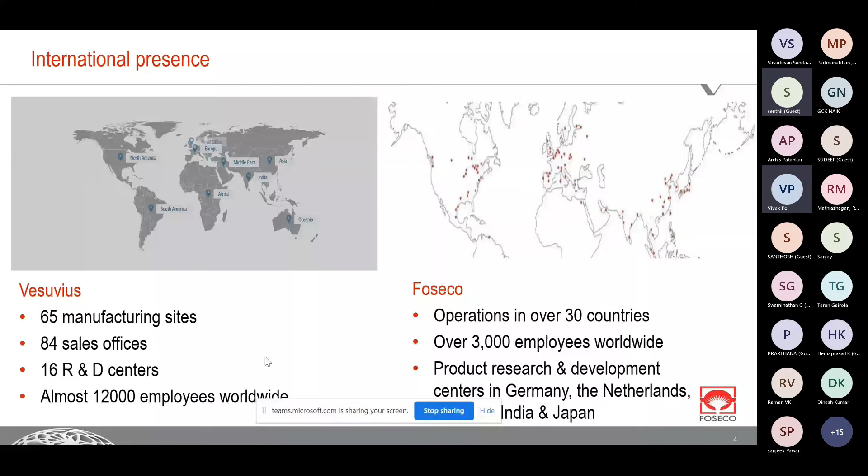As far as manufacturing sites for India are concerned, Vesuvius and Foseco put together have 5 locations at the moment: Mehsana, Pune, Pondi - mainly foundry consumables - Vizag for refractory materials, and Kolkata for flow control systems, mainly stoppers and nozzles with respect to foundry. These are the main product lines. Apart from that, the flow control products required in the steel industry are different. So overall, the advanced refractory manufacturing facility is in Vizag, and flow control is in Kolkata.

About Foseco, a part of Vesuvius PLC, which is 100% dedicated to the foundry industry. Foseco always works to improve foundry performance by offering different products, technologies, and services, and we have local expertise as well as a Foseco global team, which is present for extending their support.

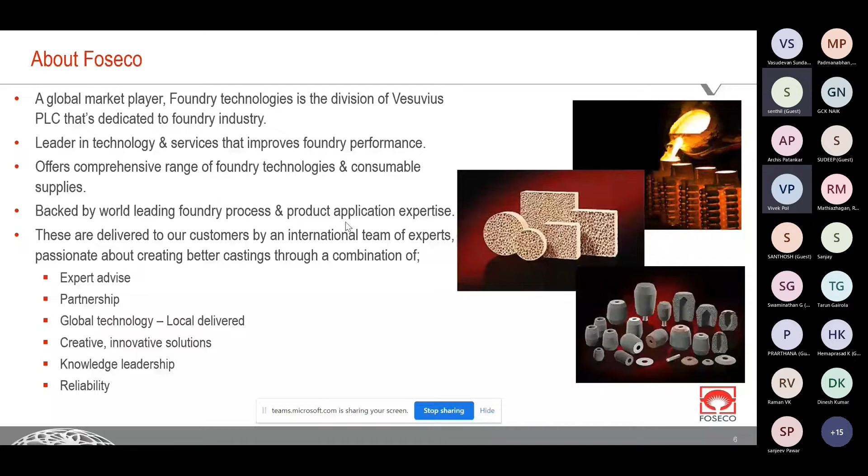So it is a global exchange. Some foundries have transnational accounts, so common practice is also being shared, and these types of benefits we get and we can deliver to our foundrymen.

About application engineering, apart from the advanced product technology, we have software. In case of feeding system solutions, we have simulation software. In case of metal treatment, we have advanced thermal analysis tools. So these are the backups, advanced tools and product technology. This overall application engineering is helping foundries to resolve issues and to improve performance.

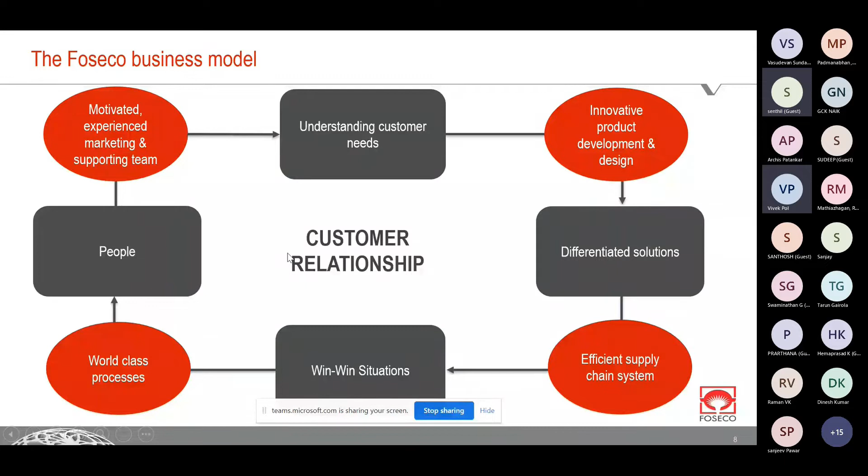I would just like to touch upon the business model. Foseco's base is customer centric, customer focused. Understanding the customer need is the first thing, and then product offerings, innovation of products, to create value and to get a win-win situation. Whatever needs are there are fulfilled with the help of world-class processes and technologies, and overall experienced people. So this is how we work.

So now we'll start our presentation with refractory, understanding refractory. So what does refractory mean? For many of you it is very basic, but still we will cover it quickly. A refractory is a material which can retain its strength at high temperatures, so deformation will not be there.

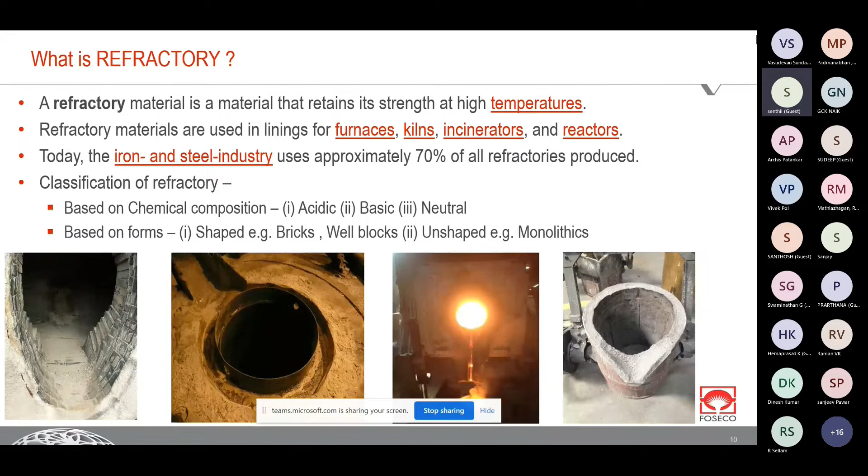The basic difference is that acidic refractory is silica based, basic refractory is mainly magnesia based, and neutral is a combination of magnesia and alumina, normally called spinel forming material, MgAl2O4. Acidic lining, which is silica ramming mass, has very good thermal shock properties. Basic, which is magnesia, has good resistance to slag attack as far as steel metal is concerned.

The choice of refractory is normally made based on what type of slag is generated in the furnace. For iron, the slag nature is acidic, so acidic refractory, silica ramming mass, is used. For steel, since the slag nature is basic, basic ramming mass is used. But there are challenges with basic ramming mass, as thermal shock is not as good as silica ramming mass, in steel melting practice. If acidic ramming mass is used, it will not withstand the slag attack.

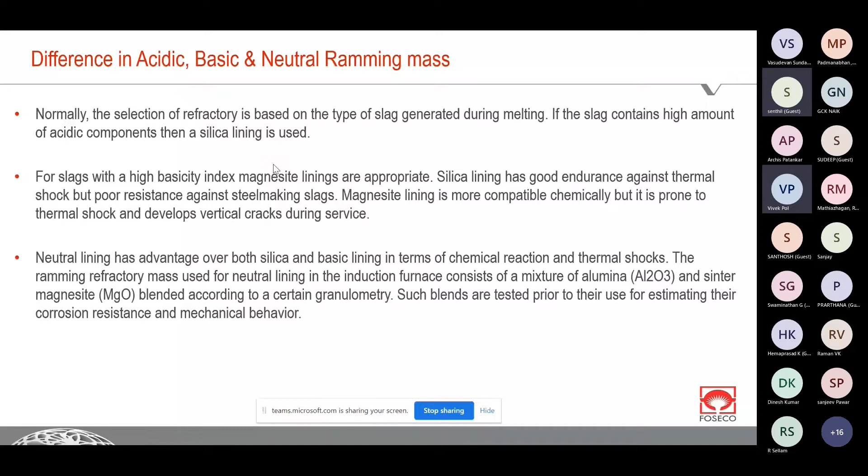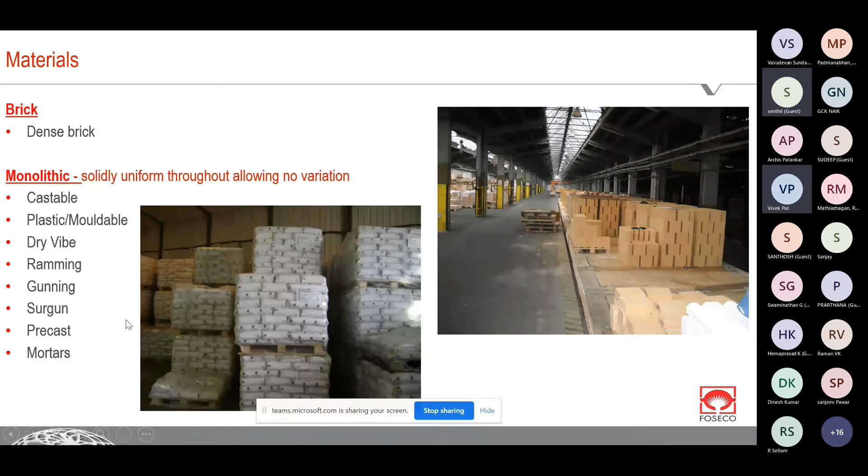So if we form these shapes, then these bricks are shaped refractories, and you can see in pictures different types of bricks like high alumina bricks, magnesia bricks, well blocks. Then unshaped refractories, all monolithics: castables, plastic refractory materials, dry vibratables, which are ramming masses. These are mainly used in foundries. All the others are products for steel, maybe for blast furnace, other than foundries.

So some basics about various types. Dry vibe is dry vibratable material. It is mainly used for induction furnace lining, whether it is steel or iron, and like we discussed, based on the metal type we can decide which lining type we should go with. Castables are the material widely used in foundries for various applications: transfer ladle lining, pouring ladle lining, maybe furnace spout repairs. So castables are highly consumed items.

In castables there are again four types, based on their cement content, calcium oxide content, which is basically the binder in castables, high alumina cement. For example, conventional castables have high cement, high calcium oxide, and there is a correlation: with higher calcium oxide we need more water addition so that the bond forms as required. As calcium oxide reduces, water content also reduces. So conventional castables with high calcium oxide, then low cement castables, then ultra low, and lastly no cement.

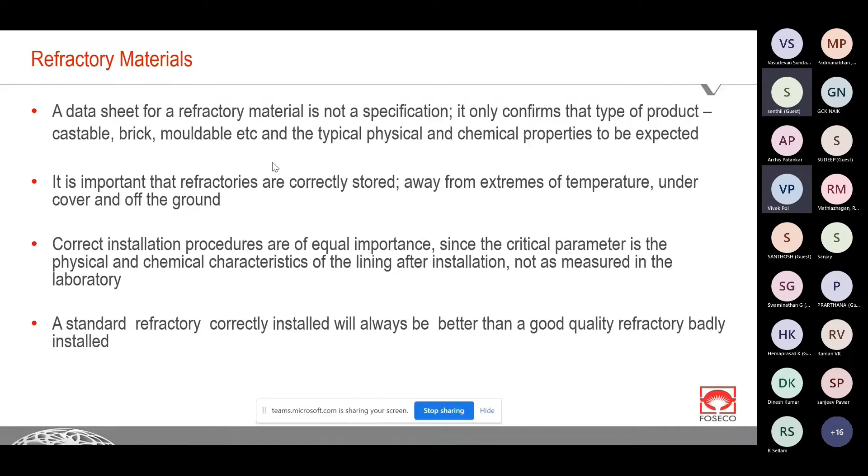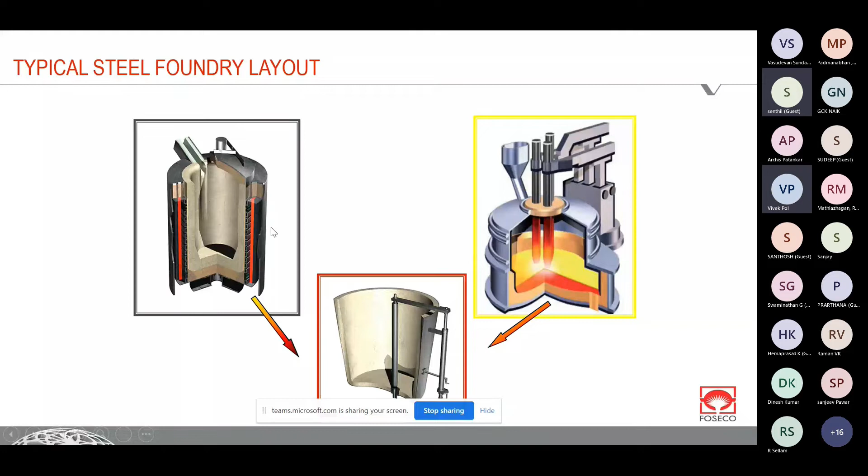So typically, for a steel foundry, this is the layout from a melting point of view. Induction furnace, and sometimes electric arc furnace. These are the two ways of melting, and then the metal gets transferred into the ladles. But nowadays we don't see electric arc furnace much. So induction furnace to pouring ladles or transfer ladles is the very popular route now. For an iron foundry, again induction furnace, sometimes cupola. From that, we can take metal into holding furnaces, or maybe into the ladles.

Okay. So this is the holding furnace, and one way could be induction furnace to holding furnace to ladle, or cupola to holding furnace to ladle.

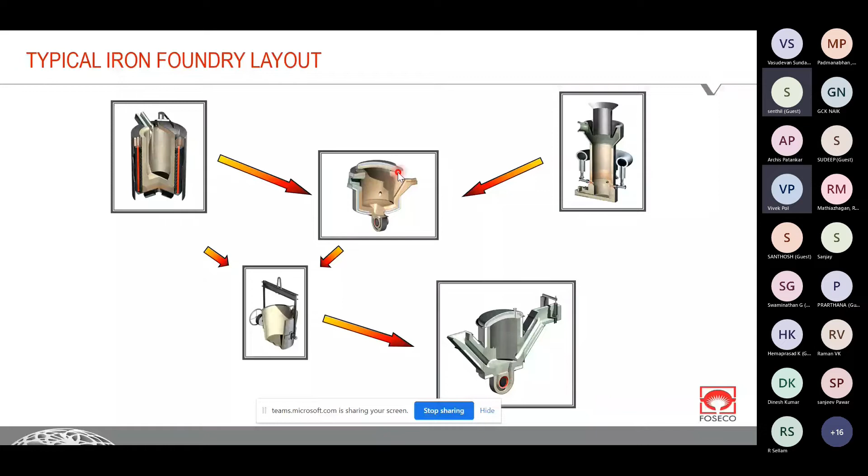Cupola also nowadays we don't see much. So normally it is induction furnace to press pour, or unheated tundish, or directly ladles.

So this is just a small video about induction furnace: if proper care is not taken, then what can go wrong with an induction furnace.

I'm sorry about the quality of video, but still hope it is visible. Sir, it's visible, but I don't know if the video is playing. Yeah, it is playing. So, yeah.

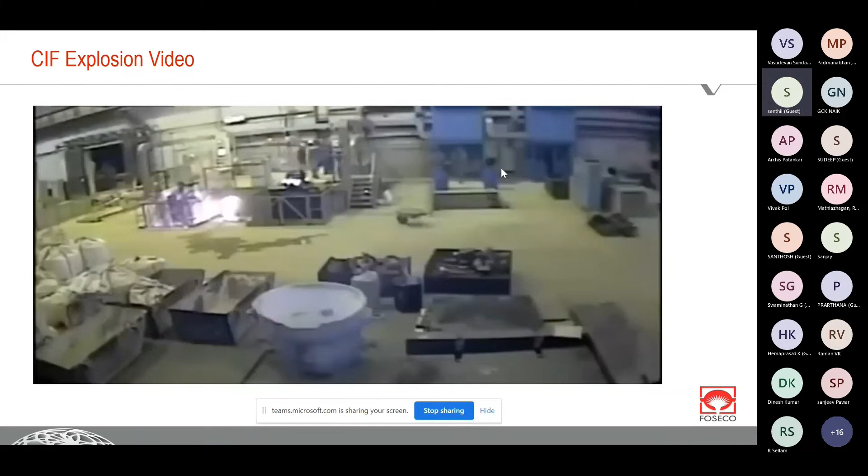So I'm sure melting engineers, or the persons who are in melting, can relate to it easily. Because of the metal penetration, this coil got punctured, and it resulted in a furnace blast. That's why when it comes to refractory, foundries are always very concerned. They hardly accept a change in the refractory sources, the materials. Since a lot of safety is involved, nobody wants to play around with it.

So we know now what the consequences are, and accordingly we take care. When it comes to product offering and services, we always have in mind how important safety is, and how we should treat any refractory trials.

So, same as what we have seen in the last video, the metal got penetrated, and most of the time metal gets penetrated from the top side. The reason is it is normally an ignored area, because we choose the lining very carefully for the main furnace lining. But when it comes to the spout and top area, we just use anything, the same lining material which is used for the furnace, or used lining material.

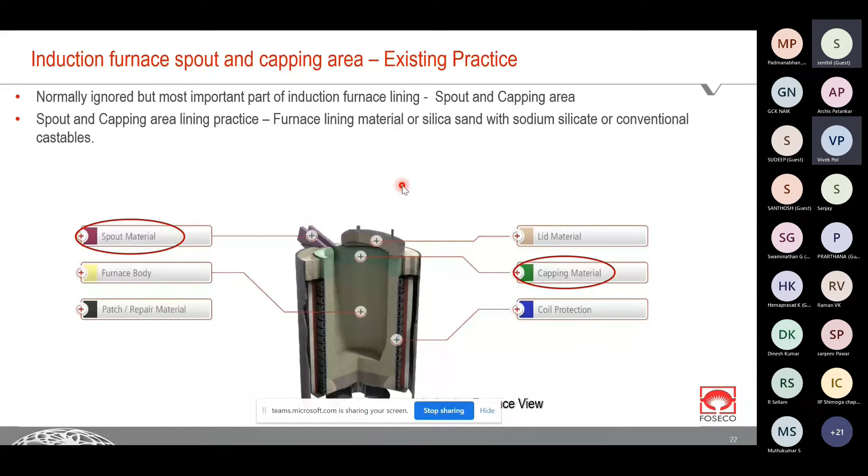We can use silica sand, some castable, but all these products are not designed for spout and top lining applications. Why? Because these areas, the spout and top, are exposed to severe conditions like heavy abrasion, thermal shocks, slag attacks, and that's why there is always a tendency to form cracks, then inclusions, and through these cracks the chances of metal penetration are very high. As a result, there are very costly runouts, and safety is also compromised. So that is the risk associated with it.

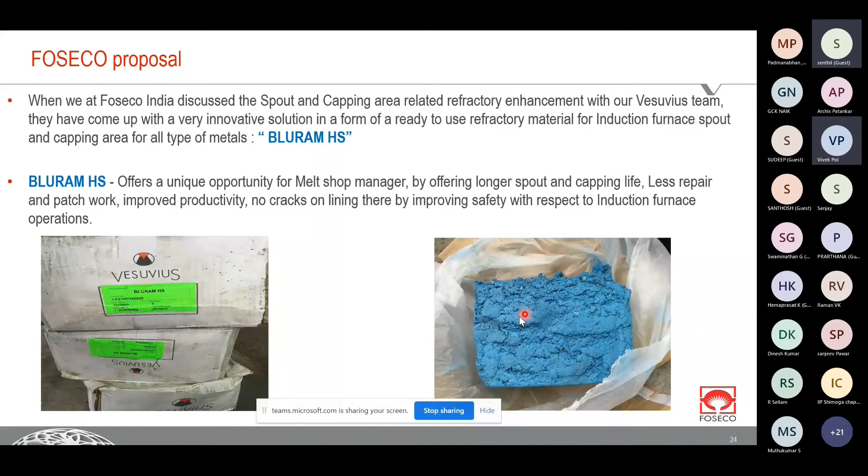So what is the product? BLURAM HS, which is specifically designed for that application, for the spout as well as the capping area. It is a plastic refractory, a ready-to-use material. It comes in the form of cakes. We can see the installation in the next slide.

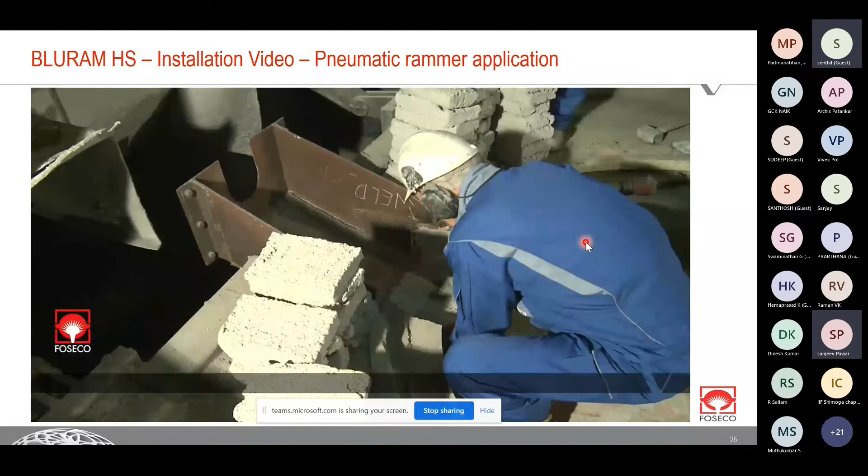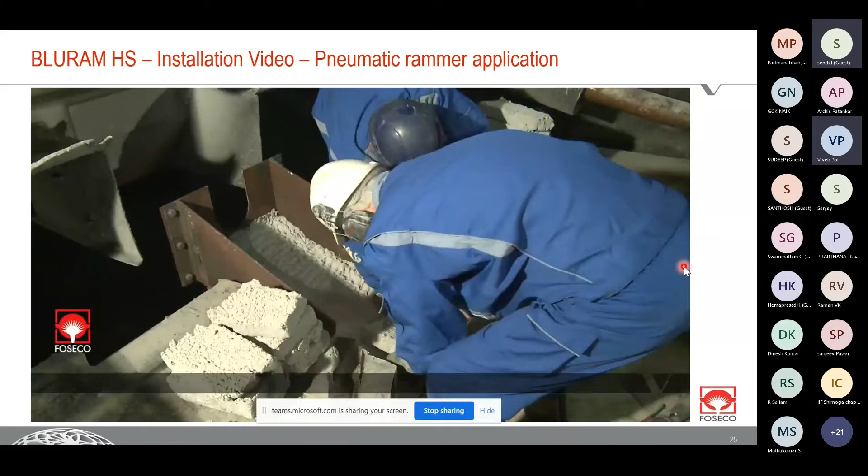It is an installation video, how we can install BLURAM HS on the furnace spout and top area. You can see these are ready-to-use cakes. It comes in cake form. You can just cut it and apply it. Here a pneumatic rammer is used. We can use a hammer or hand rammer, something like that. But we need ramming, we need to apply some force to fix this refractory.

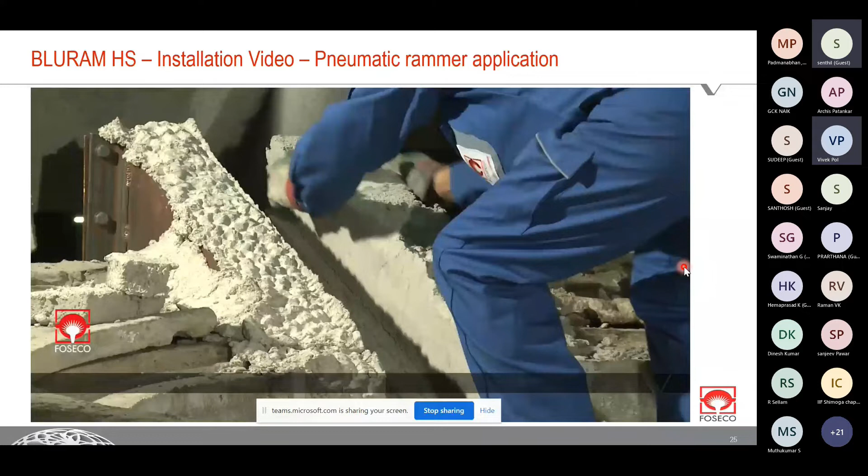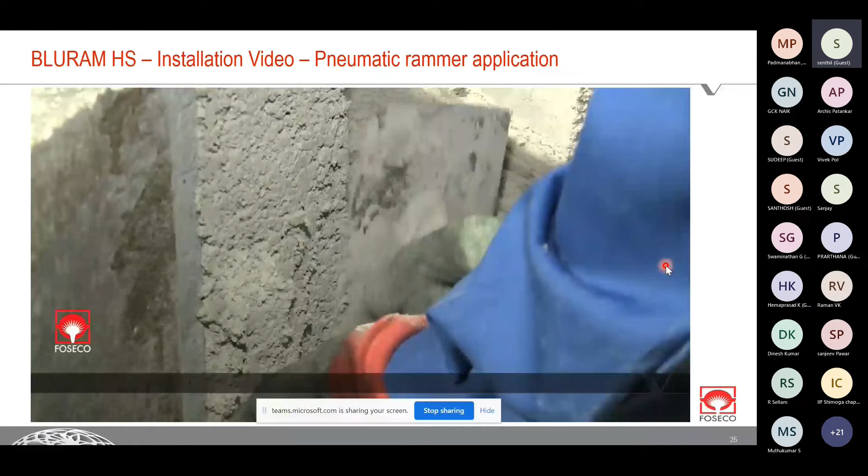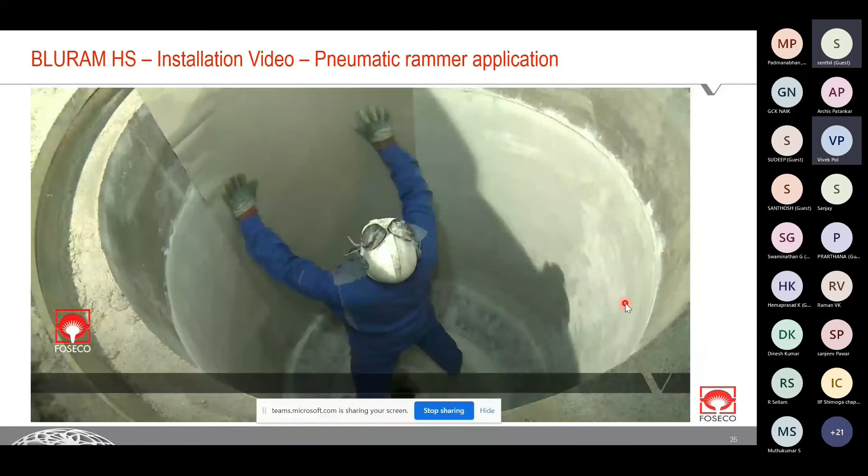Whatever excess material is there, we can remove it. We can store it in covered condition, and it can be used later. It is not wastage. So this is mica sheet, slip plane.

Okay, so about installation of BLURAM for the spout and capping area, these are some guidelines. BLURAM is basically a ready-to-use material and can be applied by ramming. Before we use it on the spout, we need to ensure it is clean. If earlier refractory is there, we need to remove that, and only then can we apply it. As in the application video we have seen, we have to apply it only through ramming.

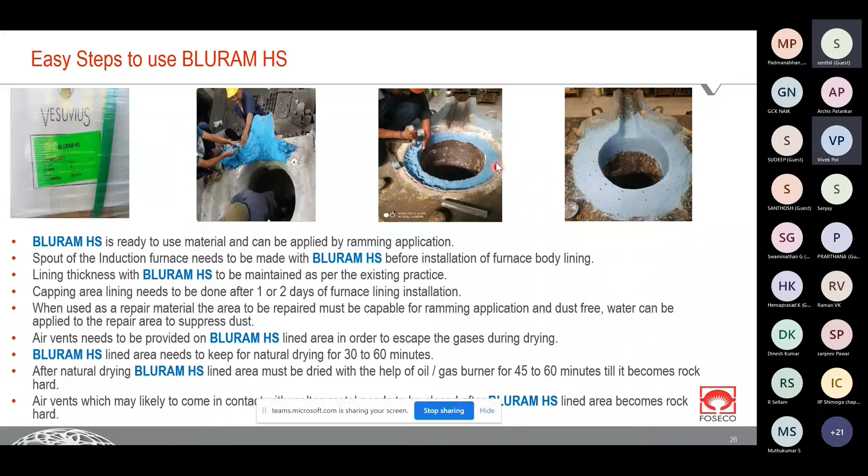About the capping application, this needs to be done not immediately after lining, but when the top area becomes hard, fully sintered, and when it has to be repaired, then the repair should be done with BLURAM, like this. After installing, just ensure venting is done so that gases can escape and no cracks will be formed in the material.

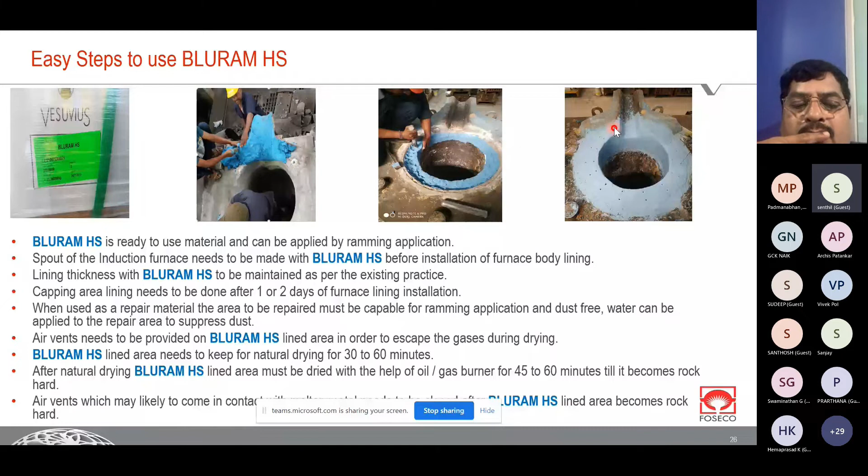So BLURAM basically gives excellent refractoriness, holds higher temperatures, is a very durable material, mainly designed for that application, so that it can absorb the shocks, it can take care of slag attack, and it has non-wetting characteristics, so less slag sticking tendency. So overall, the metal discharge is clean. So these are some benefits.

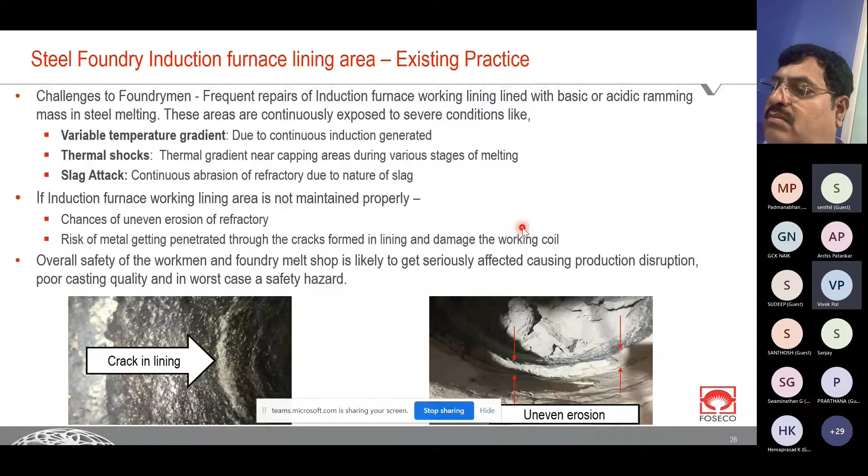So that's why a good choice, consistent quality neutral ramming mass is very important, and that is how we offer our neutral ramming mass, which is Kellundite 857. This comes in 25 kg bags, and maybe one video on this.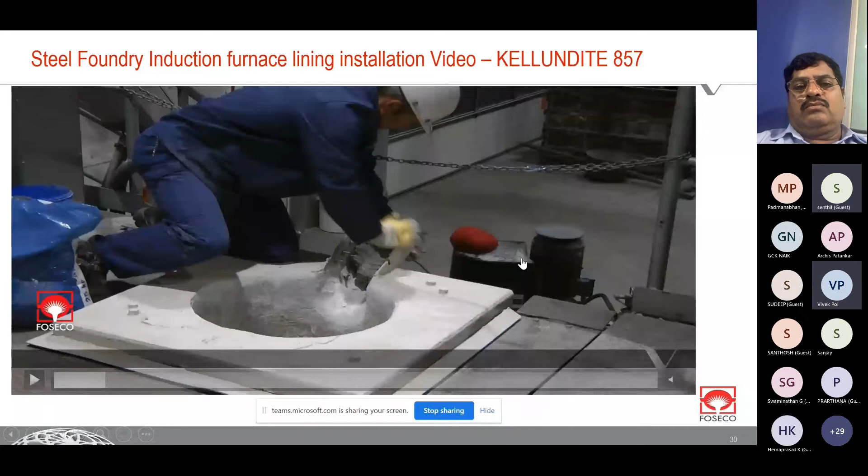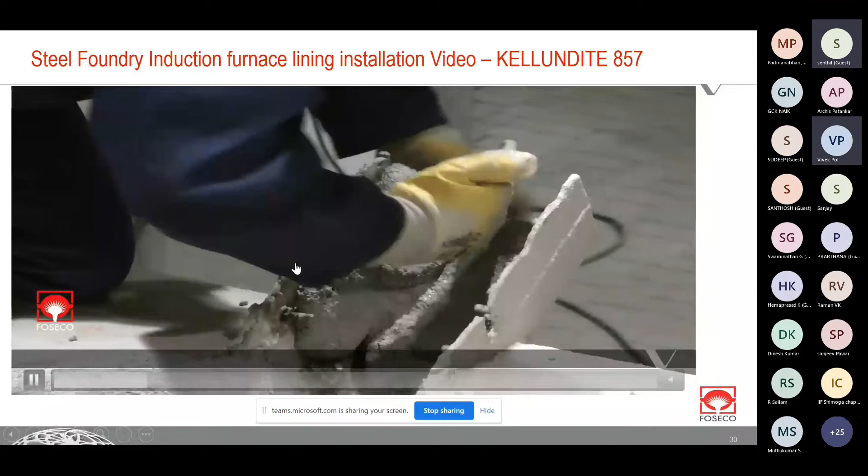So again, they have started with the BLURAM on the spout. We always recommend that during lining installation, the first installation should be on the spout, and the material should be BLURAM HS, and then we can do the furnace lining, main body lining. Before lining, just as a protection for the coil, these mica sheet papers are used.

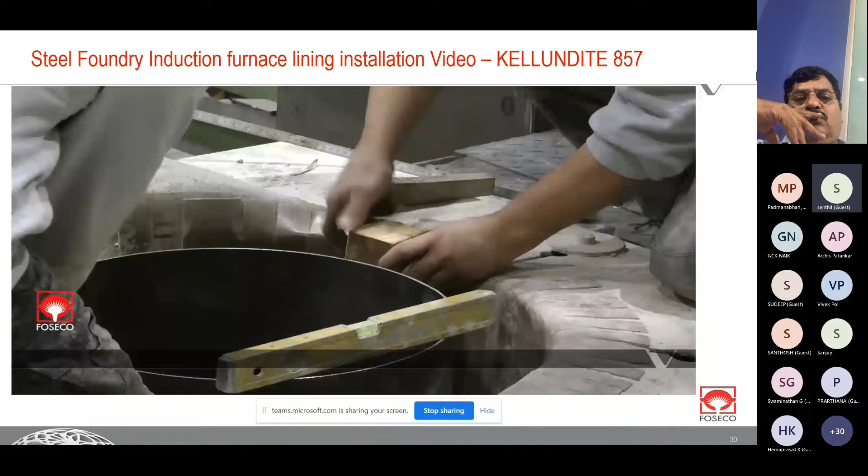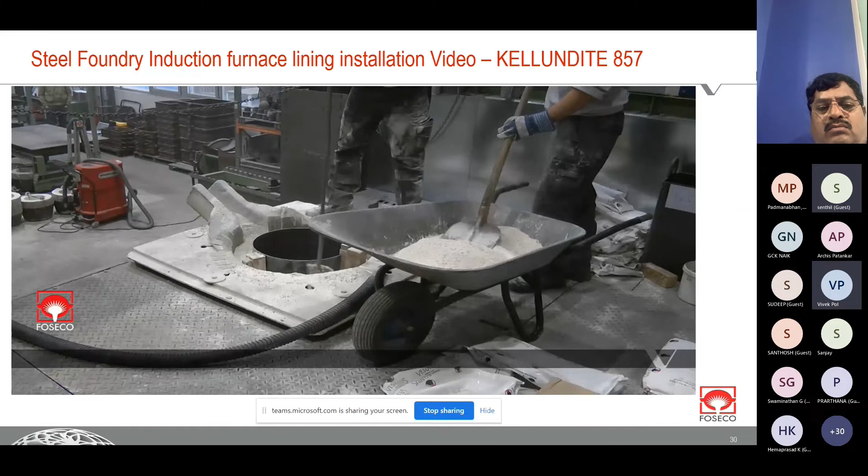So during furnace body installation, two points are very important: compaction and de-airing of the material. That's why vibrators are also used. If not a vibrator, if we have to do lining manually, then ensure proper compaction is done, and at the same time de-airing is done by using forking tools. So during installation, these are two important points. And after that, sintering is another important step.

So just what we have seen: before installation, the spout needs to be made with BLURAM. Then use of mica sheets. Then we have to prepare the bottom with the help of a vibrator. If it is not there, then ensure manually it is getting compacted very nicely. And after putting the former, we have to fill the lining. The sintering cycle needs to be followed.

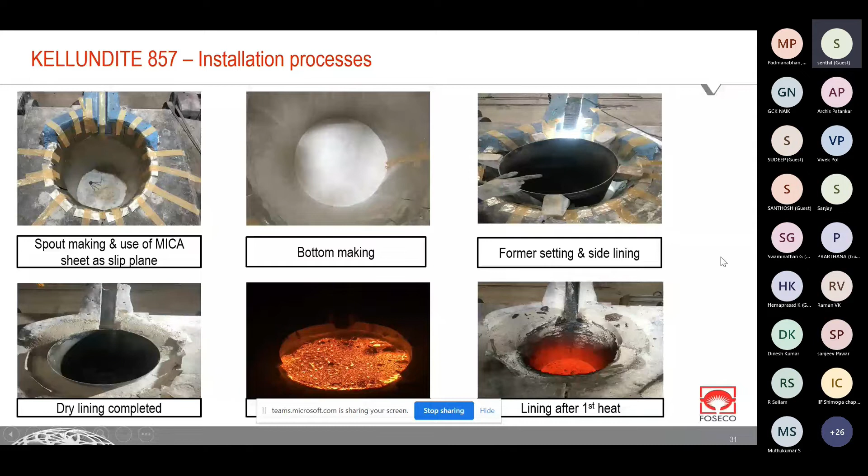That means here we need to ensure that the former should not melt before metal reaches the top. If it melts earlier, then that will be fast sintering and may result in early erosion of the lining. So the same thing what we have discussed is mentioned here.

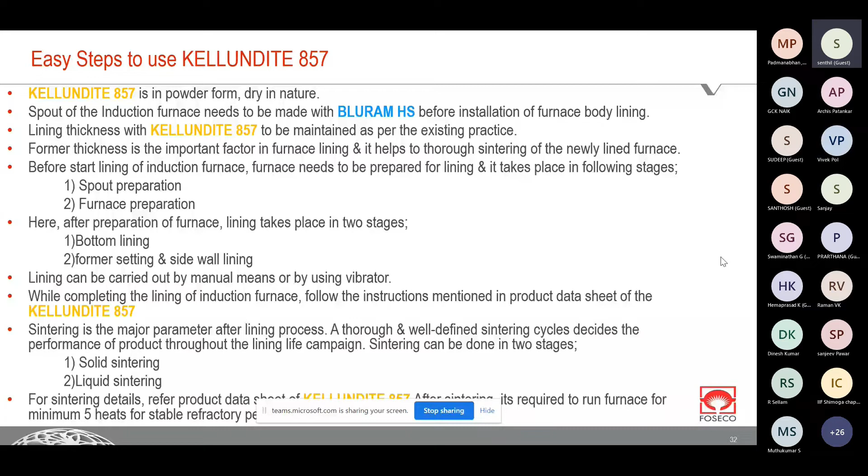As far as sintering is concerned, solid sintering and liquid sintering are the two types. This KELLUNDITE is compatible with either solid or liquid sintering. Based on furnace capacity and lining thickness, we give the sintering procedure. Typically 50 to 60% of furnace capacity is the requirement of furnace lining material.

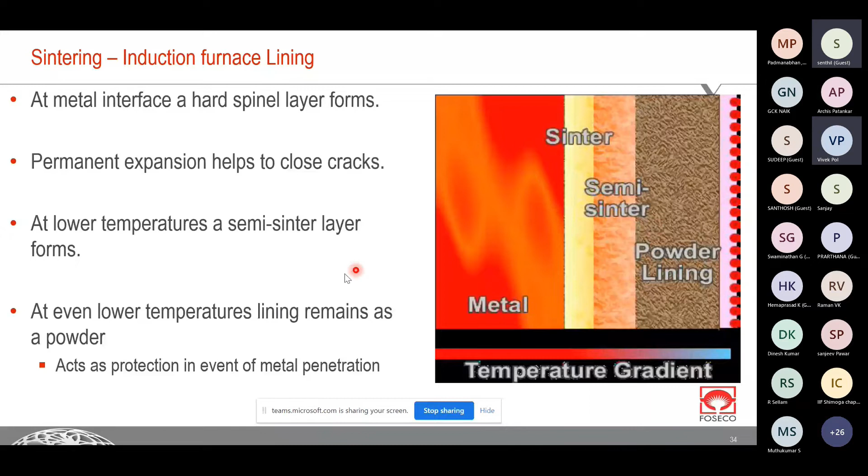So this is something we need to understand. When lining is new, you can see a small sintered layer of material, then semi-sintered, and the major part is in powder form. Basically, to take care of metal penetration, if it comes, this powder lining will take care of that. When the lining becomes old, the powder form becomes smaller.

But if your furnace lining condition is good, the measure for that is when you break the lining, there should be a situation like this. You must have material in powder form at the backup, then semi-sintered form, and then sintered form, which is the metal facing area. Obviously lining erosion is more when the lining becomes old. But this powder form should always be there.

During usage, there is always a tendency of some crack formation because of the thermal contraction and expansion behavior of the lining material. So how to take care of these cracks? That is what we tried to show you in this picture. Do not fill the cracks like this. We just need to apply the patching material just to cover the crack.

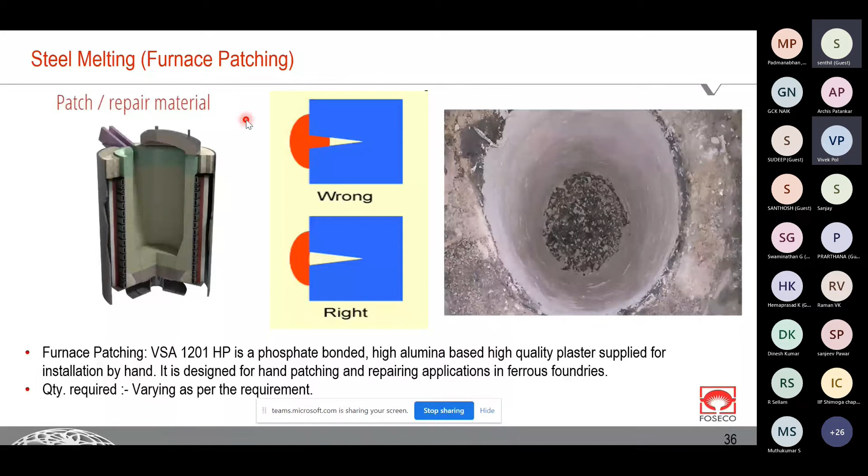Because when we start the furnace again and the material gets heated up, these cracks automatically get closed because of the thermal expansion property of the material. If we fill the crack, then during contraction, this will exert pressure on the lining, and more cracks will get generated. So we need to take care of this. We should not fill the crack. And the material VSA 1201 HP is what we recommend for patching application.

So now for ladles. So we have seen furnace spout capping installation practice, where Blue Ram HS can be used, and it can be used for steel melting furnace or iron melting furnace. But when it comes to Kelundite, we have seen the second application, which is furnace lining, and that is for only steel, and the material is Kelundite.

Now for the third area, which is transfer ladles or pouring ladles, for both iron as well as steel foundries, we can use a different range of products like Criterion, Duraflo, Cercast. Like in the beginning we discussed, based on the cement content there are different types of refractory. So, for example, Cercast is conventional castable refractory where the cementing agent calcium oxide is more. Then Criterion is low cement castable. Duraflo is ultra low cement castable, and it is self-flowing material. No cement castable I have not mentioned here, but that product is also there.

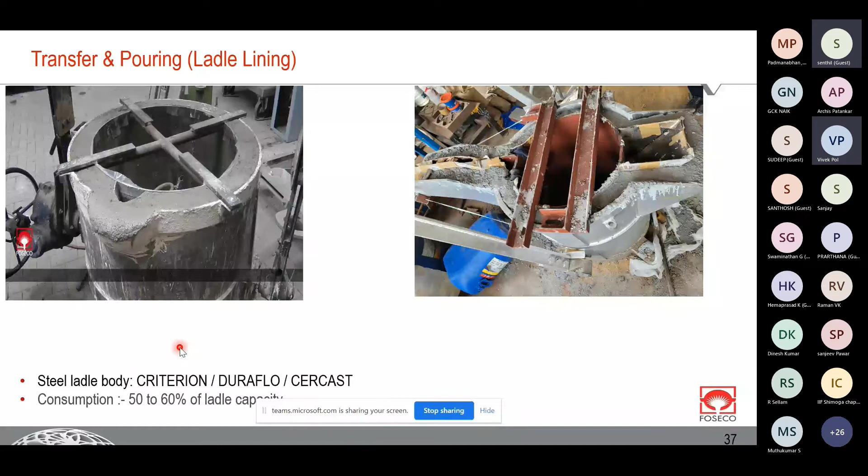About consumption, 50 to 60% of ladle capacity will be the requirement. Like here it is a T-spout or integrated T-spout ladle. There also we can use regular lip pouring ladles, or even bottom pouring ladles; there also we can use any of these refractories. Again, selection is based on what performance we are expecting, what are the sizes of the ladles, temperature requirement, and cost. Based on that, we can select which type of lining material we should use.

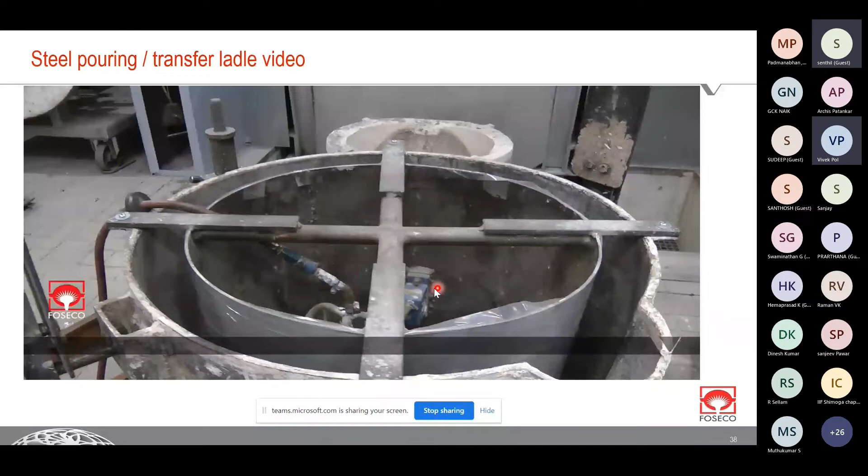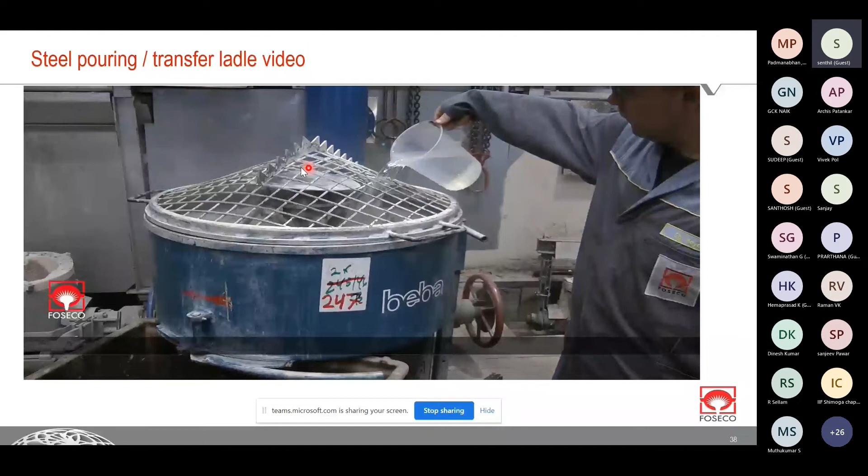A small video about how this ladle lining can be done. The material used here is low cement castable, so it needs a former, and we also need to use a vibrator for homogeneous installation. The mixer used here is a planetary mixer, so that it ensures proper mixing of the material. We can adopt some of these practices about safety. So proper guarding is there, and ensuring proper mixing is there.

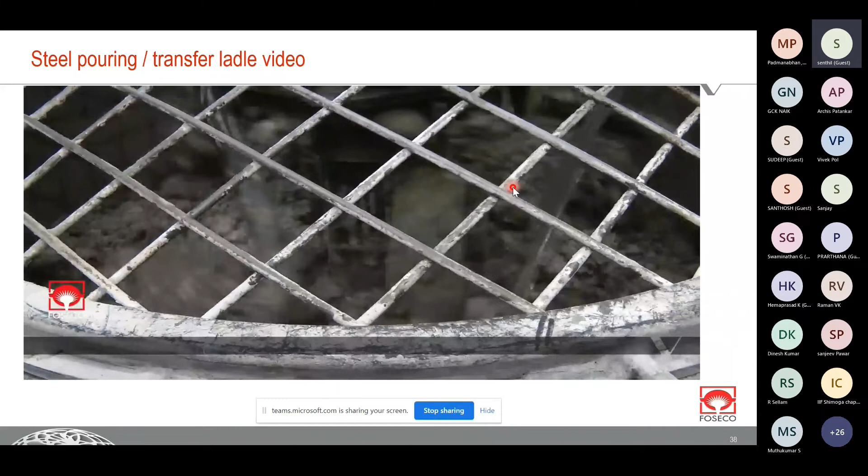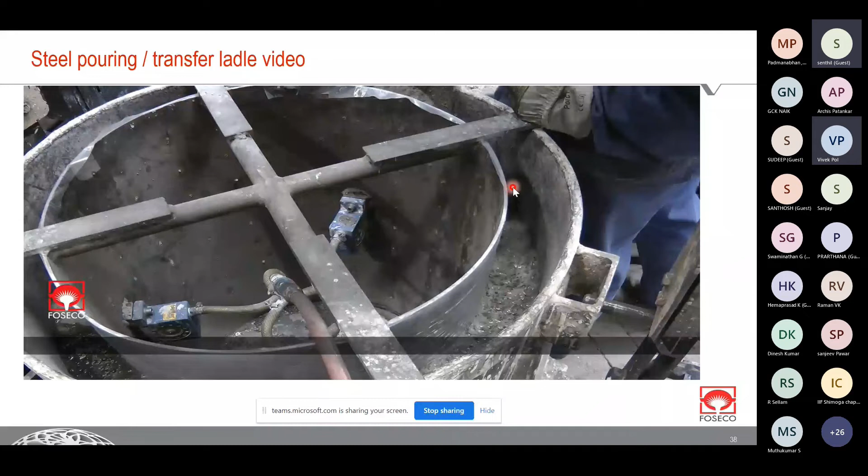So again, normally we ignore the water addition. As per our judgment, we normally add, but that should not be done. Based on the type of refractory, we should calculate the water amount. Maybe not exactly, but in the range. Like if 8% is required, then we can consider some 7 to 10% or 8 to 10%.

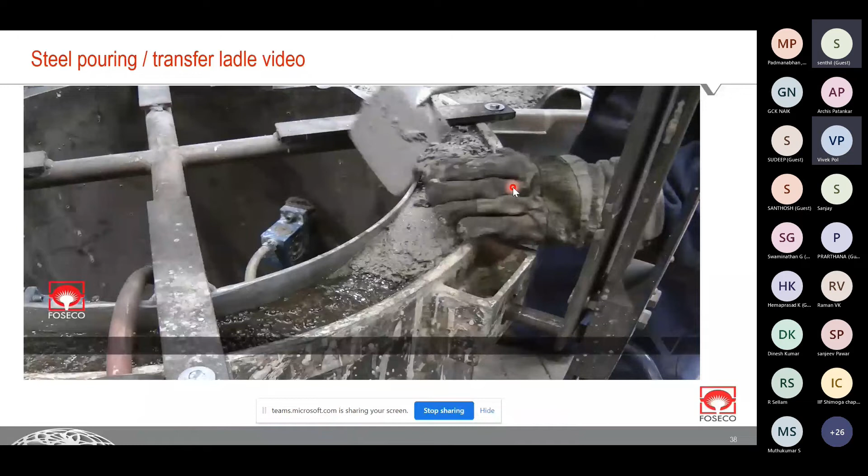But it should be calculated, because if water addition is more, then when we preheat the ladle, the majority of this water evaporates, and the lining material is left with more porosity. And if porosity is more, it will result in more slag generation, more slag deposition, because that porosity will act as notches where slag can deposit very easily. Overall refractoriness of the material will go down, and overall performance of the refractory will be down. That's why we need to take care of these small things.

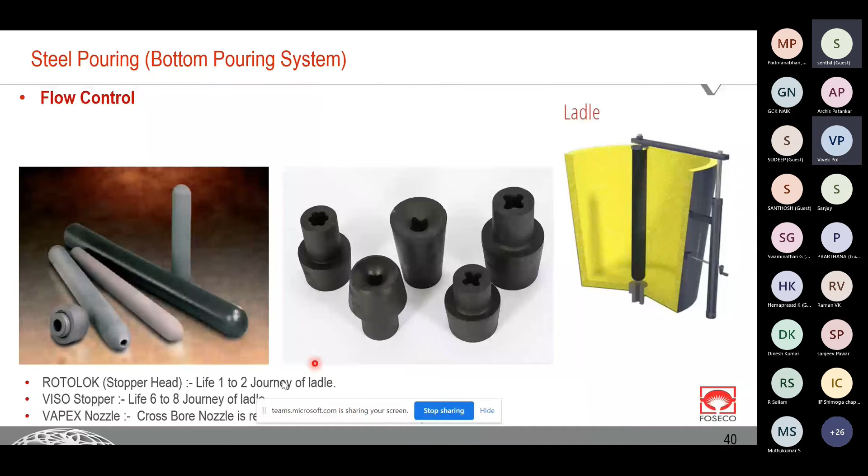So we can see, but before that, we can see this Viso stopper installation video.

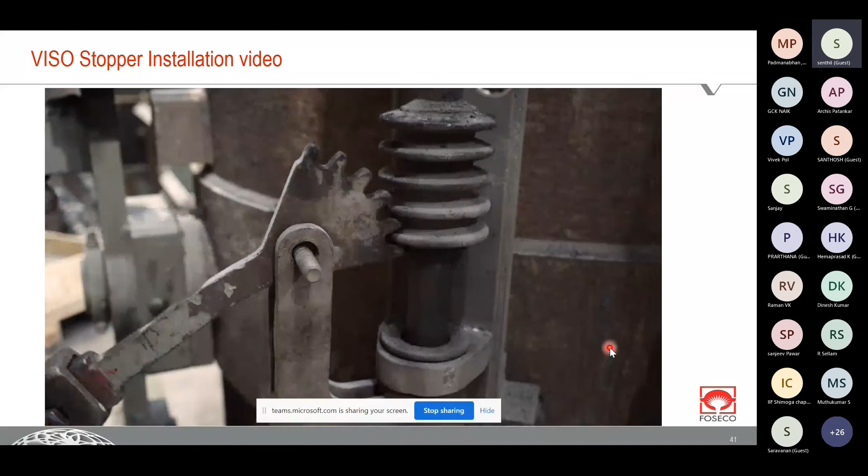Yes, so that was the steel pouring ladle bottom pour mechanism, and we have seen the stopper installation, how it does.

Some of the actual on shop floor pictures we have tried to share here. This after installation. Second step is this: we need to put a stopper under preheater. In the ladle stopper is there, and it needs to be preheated.

So at hot degree, around 900 degrees Celsius, we need to preheat. It should be red hot before metal gets tapped. So after this, after pouring completes, then this is how it looks.

And after use, if the next heat is immediately done, we can use it as it is, and otherwise we can take it out, and we have to store it on a vertical stand. There you can do some repair works also.

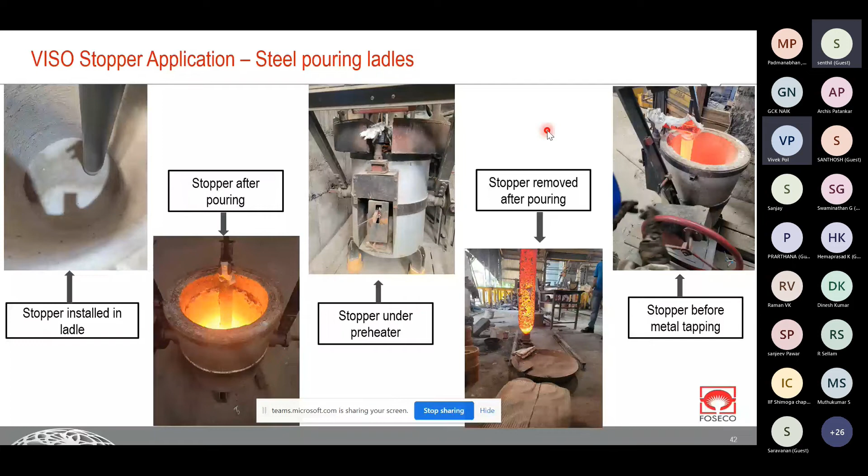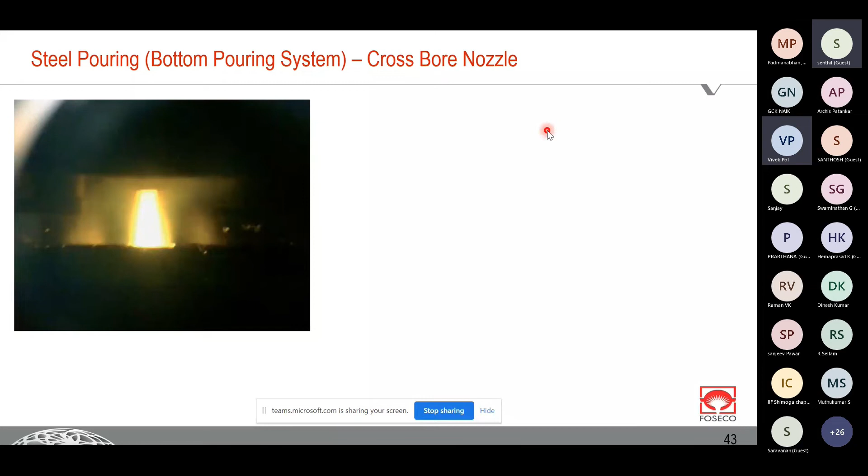Now about crossbore nozzle, a different type of nozzle. So this is a regular nozzle where you can see the metal flow here, and this is crossbore nozzle metal flow. The difference is very clear. There is more turbulence in regular nozzles, and you can see a very laminar flow here.

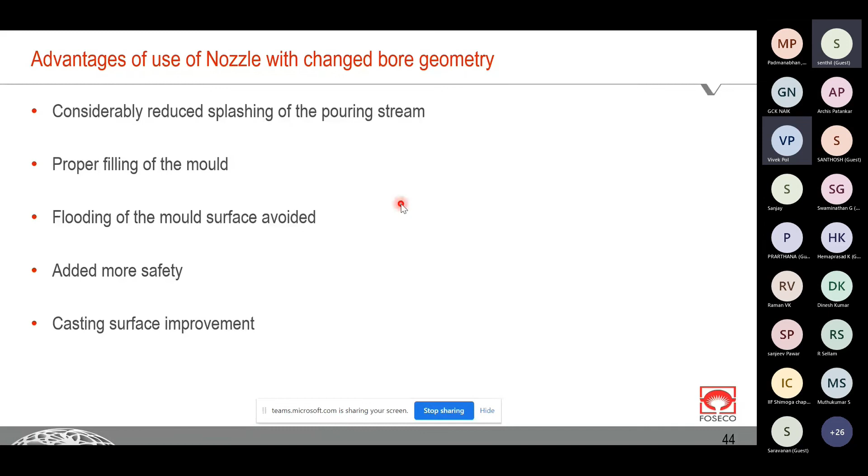And the benefits, obviously, like oxidation will be less, metal wastage will be less, like it will fill very accurately, and because of the less turbulence, from casting quality point of view, like surface finish and all, that will also be good comparatively. So that is about crossbore nozzle.

The stopper which is used for iron foundries, basically in unheated tundish or press pours, there we have different stopper technology, which is VAPEX. So for steel, we recommend VISO stopper, and for iron foundries, it is VAPEX stopper. So technologically, there is a difference, and the major difference is in terms of oxidation resistance. In case of iron, we need more oxidation resistance, and that's why these are specially designed materials for considering those applications.

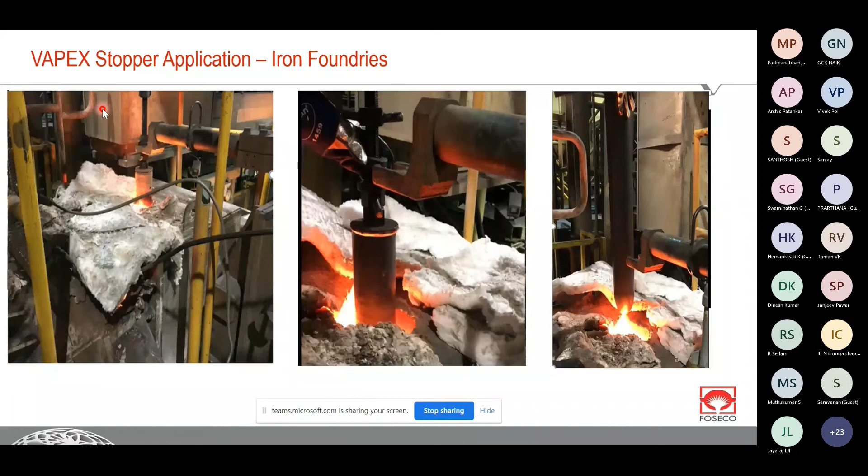Then this is another improvement or technology which Foseco has, a new product which is VAPEX FosFlow nozzle. It is basically a nozzle system which can be used for steel as well as iron foundries. So how it works, again a small animation video about this working.

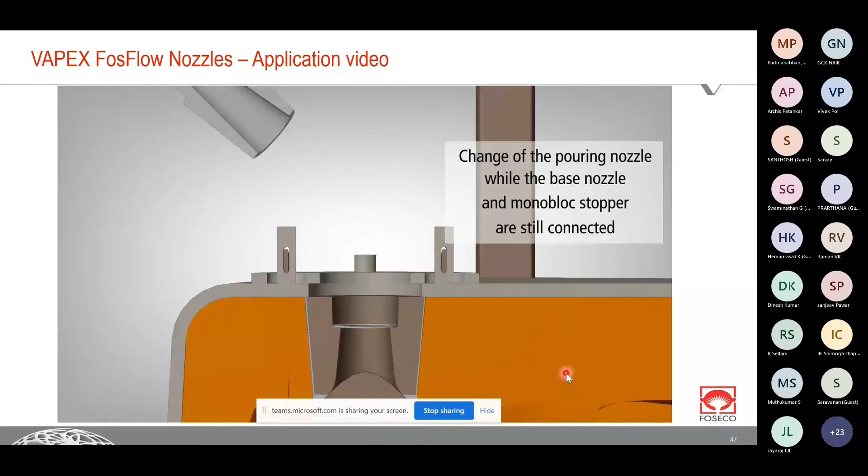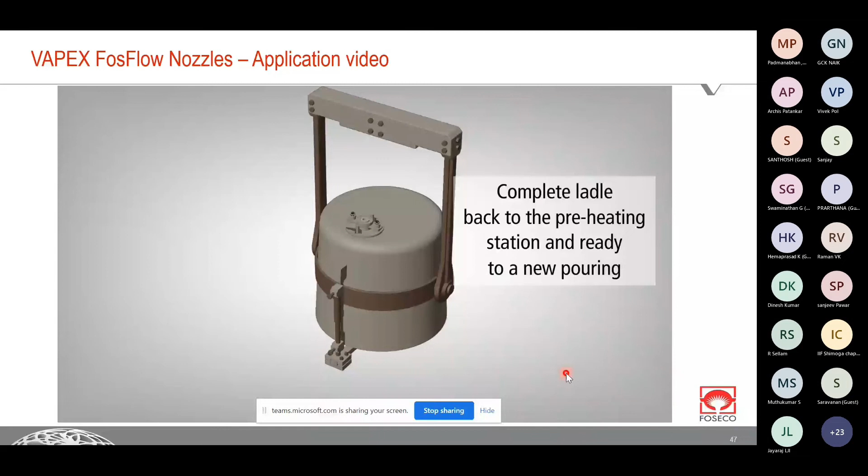Basically there are two nozzles in Vapex FosFlow nozzle system. One is base nozzle and other one is pouring nozzle. So the pouring nozzle, we can change it when ladle is in red hot condition.

When stopper is also there, stopper is installed, and just after one pouring, if you want to use different diameter nozzle, so immediately in hot condition you can use it without any delay. So your production will not be affected.

So these are some benefits, and same we can use it for your press pour or unheated tundish, to minimize the downtime. When it is like press pour, you can change the nozzle immediately in running production as well. So this is something Foseco's new process, a patented technology.